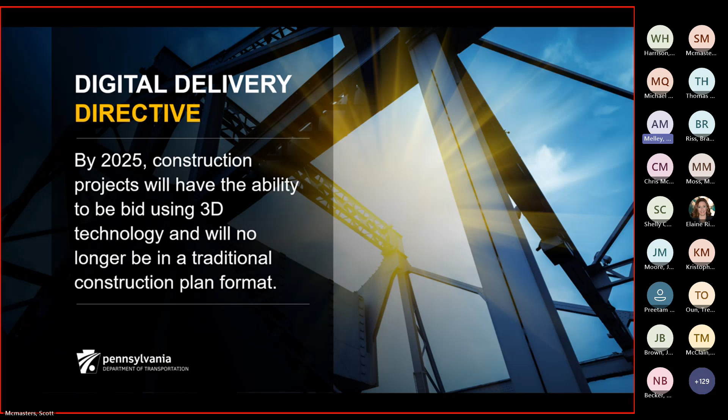So our initiative, next slide, Scott, is really right now consisting of 23 different pilot projects across the state. We're looking at various aspects. So we have 2 projects that have been constructed, 2 are in construction right now. Both of those projects are bridge projects. So complete structure models, no plan sheets whatsoever. Then we have 19 different projects that range all over the design spectrum of where they are. So with that, we are piloting all of these various aspects.

We've seen benefits from the contractors. One of the projects that we have completed actually finished a month and a half ahead of schedule. And we attribute a lot of that to the increased efficiencies that we've been able to realize with our digital delivery projects and our implementation and so forth. But to really get through this, as we are looking at the design and at the construction, we need to figure out how we're reviewing these projects.

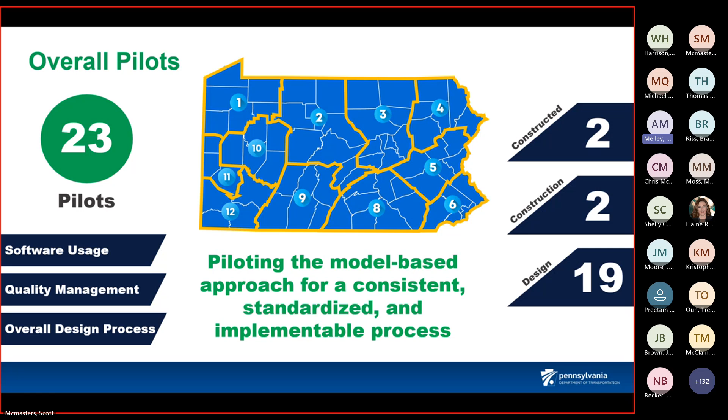And that's where this webinar really comes in: how are we looking at these projects early on in the design, maybe not even at a milestone review, and then at each of those milestone reviews and then getting it out to construction. How are we connecting the data? And what have we done to really set that up to make that a reality? So with that, I'm going to turn this presentation over to Scott McMasters to really go into the nuts and bolts of what we have set up and how that's being accomplished. So Scott, go ahead and take it away there, buddy.

All right, thanks, Alan. So first thing, PennDOT is using ProjectWise as the environment for all this. So with using that environment, we have to think about permissions and setting up things, because we store all the data in ProjectWise. Now, it may be connected out to the review software and things like that, but in order for reviewers to use it, I have to make sure that I set all the permissions, the roles, the information up first. So ours is based off of ProjectWise. We're using enterprise level for access, federation, things like that.

We have 365 Synchro that we're able to use the enterprise roles that are across the board. But then when we get into some things like infrastructure cloud, there may be project-based roles we have to do too. So it's a mix of both right now. Now there's some change coming in the future for some of that stuff, but today we have to do a little bit of different setups depending on which platform we're using for which review and for construction.

Now, the other thing that comes into play with this stuff is internally, we have different users at different roles. So with those roles, they might be a bridge user, a roadway user, they might only have read-only access to something. To do some of the review processes, I have to make sure they have access to write to certain things. So there are going to be pieces of that come up throughout the presentation that point to permissions and making sure you get the things set up correctly to start with.

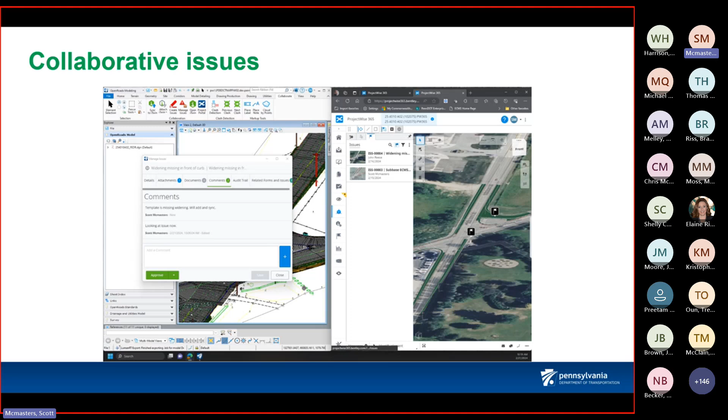Once I add that, we'll go back over to 365 here and we'll look for that issue. So I can go over there. And this was all done at the same time. One thing we have noticed is sometimes it doesn't refresh. So you've got to back out, repick the issue. It's that refresh just like you have on a website. Until you hit the refresh, it doesn't show up. I could hit the refresh at the top also, but it's there.

So I can look at the information. I can go to these and see, okay, when was it assigned to me? How often? I can click on it here, pull it up, look at that actual issue and the attachments on it, the comments in it. Everywhere I go, the comments are going to be the same. They're not different from one to the other. It comes across both environments.

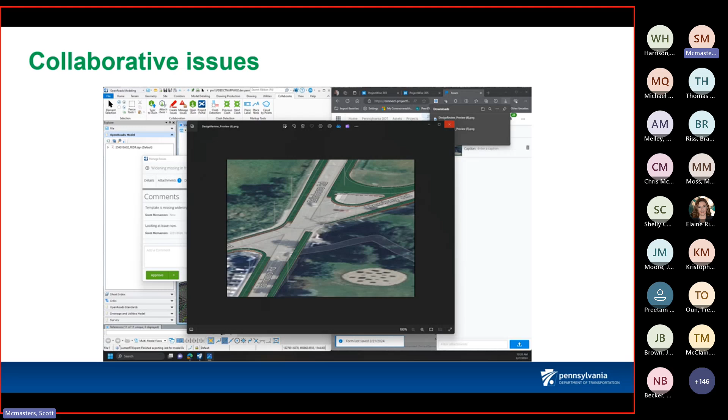Now, this here is opening up a download. So basically, in 365 the images are live, so it'll pull up a model, things like that. But if you're in ORD, I have to open it as a PNG essentially. The other thing is there's audit trails.

I can add attachments, everything else. There's a lot of things around issues you can do. And again, I'm just scratching the surface today.

There is a lot of information I can also provide later or in other presentations. Now, let's switch from that more traditional PDF. Let's start thinking digital. So when we think about digital, the old was that cross-section view. Now we're thinking today, it's dynamic. It's information that's tied to the model.

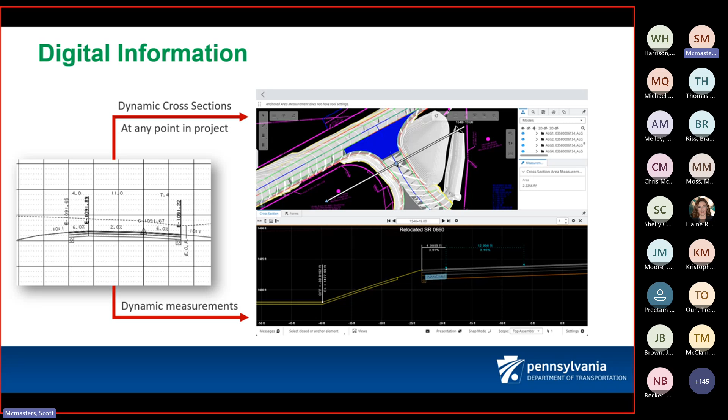So if the model updates, the information updates. In some cases I have to do some manual stuff, in some cases I'm going to automate things as I go through this process. But again, digital information doesn't mean that it's strictly 3D. I'm going to have 2D views. But when I do these 2D views, these views need to be based off of the model. So this is me taking a slice of the model and then adding dimensions to that slice. So it's still a detail, but it's based off the model.

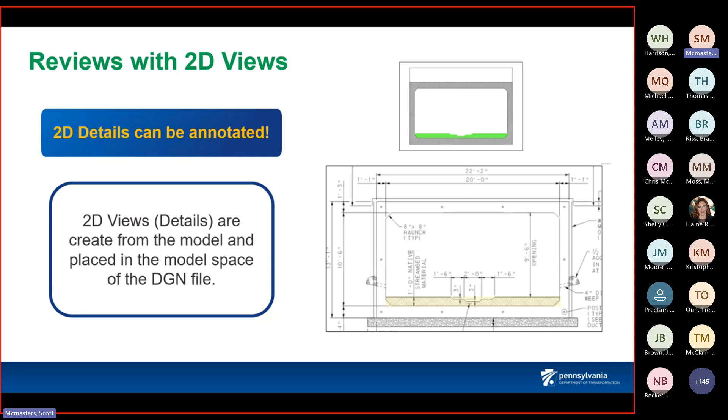Now there are some caveats to this that we found. In some cases you have to make sure that you do the dimension to the components versus 3D lines, because those 3D lines, the way they generate, sometimes breaks the connection with the dimensions. So a lot of times you're going to be going to those solids or those components to get the dimensions to hold, so that as you're updating stuff, things come across.

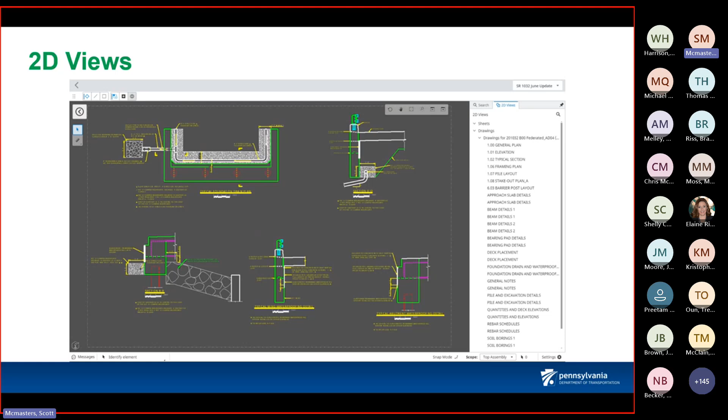So let's look at a couple of those. We're going to take, and this is an example of one of the bridge projects that's in construction right now. These are just 2D details. You can see they're just slices. It's just information. It looks like it always did in a normal PDF or plan set.

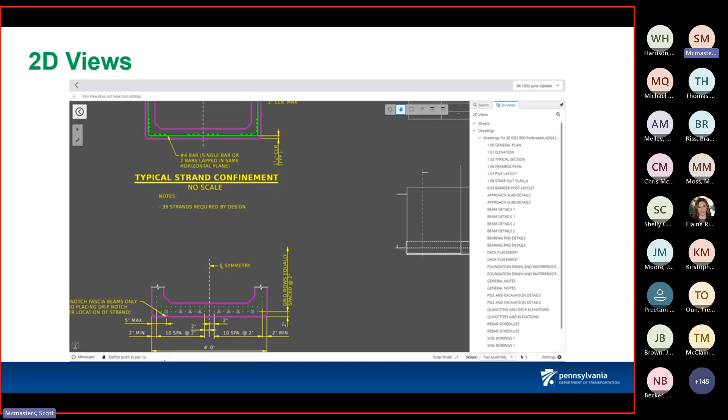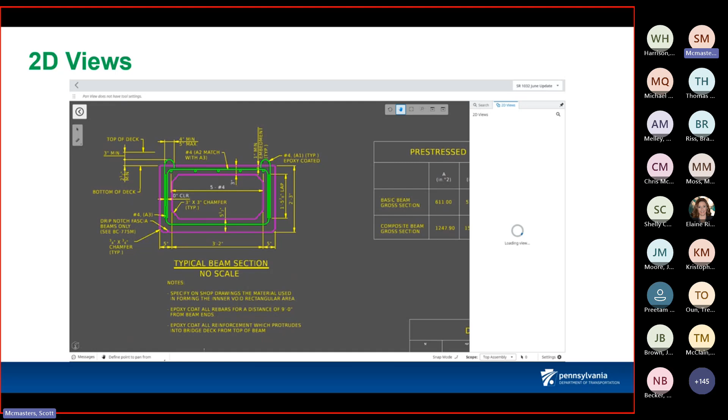But in these cases, we've sliced something. We've added notes to it. We've added comments. We've dimensioned things. This is information that contractors need, or reviewers need, or somebody taking and certifying this document or this model. So these are all things that still have to kind of be there.

And again, this is where we're saying it's not all going to be 3D. You may have a detail that's using that 3D as well. So we're starting to move towards these 2D views that are sheets, drawings, as a way to incorporate the details into the model and not produce that PDF.

Because if you do a PDF, what's the first thing most people are going to do? They're going to print it because the option's there right off the bat. To give this a fair shake, we have to make it that we're providing the information, but still making it a little bit harder to go back to that old workflow.

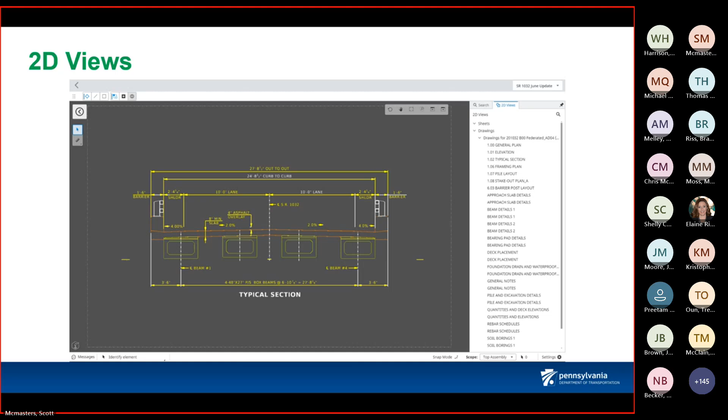Now, as we do all this, one of the key pieces to this whole thing is the federated file. So when we're setting up these models, we have to make sure that federated file is correctly set up. It's very important to have the correct coordinate system.

So with PennDOT, we have two coordinate systems. We have a north and a south. I have to make sure I'm the right one when I create that federated file. I'm then going to reference in my survey and all my other files.

Now, one key piece here, and I'm going to stress this, because if the survey is not set to active, it doesn't turn on that 2D, 3D view. You have to have that for these iModel connections and the information to come across from your native platform into Infrastructure Cloud and ProjectWise 365 and that. So it's very important you set that active whenever you get these files in there.

The other thing is we're only placing the references for the model in here. Currently, we're doing typicals and things as a separate connection to make sure that our fonts and stuff come across correctly. But when we do these references, we also make sure the logical names are defined.

And we're using our 4-character naming convention to do this. The other thing we're doing is a description. And these are pieces that help when you're doing the review and the iModel, because there's times that you're going to click on something and look at properties or hover on it. And if you don't update this information, you'll get master model for everything under description, or the logical name is blank. If everything says master model and everything is blank for logical, where's it coming from?

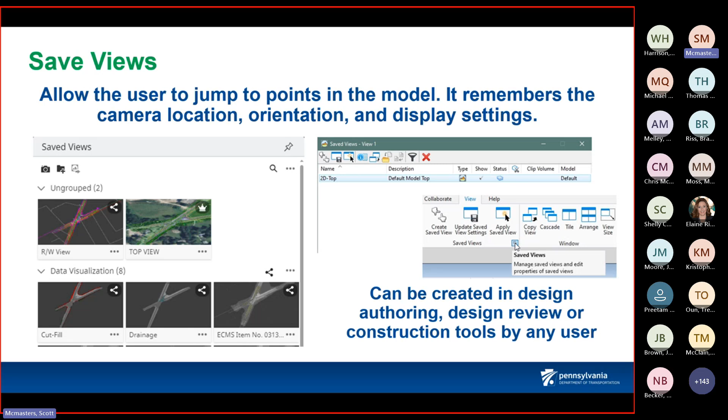By setting up save views, it creates that quick jumping to saved points in the model, things that might be important to an inspector or somebody else throughout the review process. Now, taking that further, we also have data visualization. In this case, I'm taking my pay items, identifying them, and assigning them through item types to my pavement layers. I can turn those on and off. I can also select my base and look at my quantity on the right side. The properties are there from the item type.

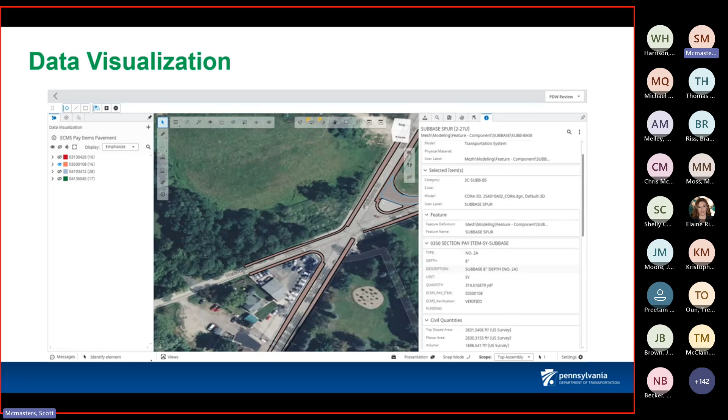Now, if I go over and turn that base off, and I just have sub base, I do have to click off and come back on to the object I want. But again, you can see it switch to the sub base. There's the quantity, there's the pay item.

Now, if I go to a different visualization, this case it's going to be sidewalk. One thing to note here is if I pick that from over there, you can see it says varied on the right side. That's because it's picking everything that's underneath that particular item. To get actual quantities, I have to go to that element within the model. So if I don't pick the element, I'm not going to get the information.

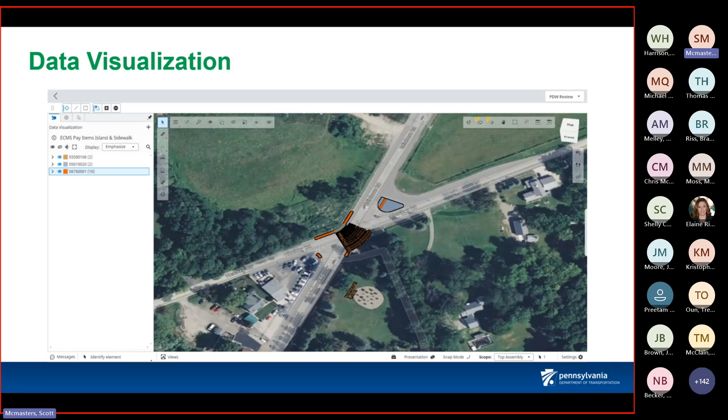Now, some of this stuff is still things that are going to go to reports. So we don't get rid of reports. There's still some things there that you'll see through a report or through other areas to get quantities.

The other thing that has helped us a lot is corridor analysis. This is a tool in our toolbox, is the way I like to look at it. Now, the key piece here is this is based off of alignment, so any components associated with that alignment today, this allows us to pick. Now I can do station ranges. I can also pick what I want to analyze or what I want to ignore.

So when you see this resurfacing group here is what they're calling it right now. Again, this is in preview, but they're calling it that because one of the things we ran into was with our data set, we had a mill or an overlay component in there. Well, our milling component actually went across a couple of the layers, so it was having a tough time distinguishing what do I group it with, or do I want to analyze this for changes?

Well, we know milling and overlay components are going to vary from template to template possibly, so every drop might be different. Do we necessarily want a report telling us that when we know that? No, but we do want to see it still in the sections or in those type views.

So there's that ability. The other ability is to look for changes in the layers. And if you look at the one shot there that says corridor analysis settings, that's where those change onlys can be flipped on to go to things. And you can look for changes in width, depth, cross slope, elevation. The other thing is, in the next slide I'm going to show you, is that force to top. There's things that switching that off helps you with as far as this review process as well.

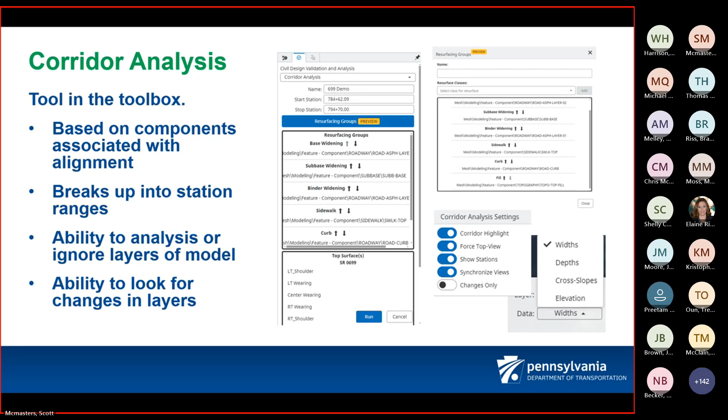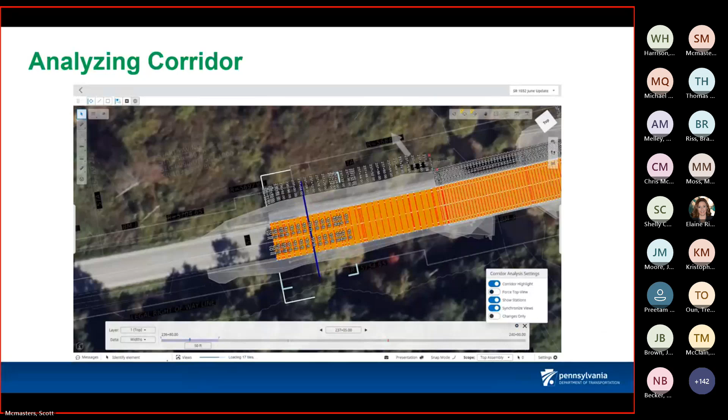So here, I'm just going to open up one of those corridor analysis. This is a bridge project that we're doing new approaches and overlaying the structure. So I'm going to turn off the force to top, and the reason I'm doing that is so that I can orient this so it basically lines up with my cross section. And you can see there, I picked my cross section.

Now, one thing that is kind of a caveat right now is when you first go into this, you do have to step to the first station. It doesn't start on one of the red lines. If you're not on one of those, you're not going to get the information. So today, this is limited to template drops. But you can see here, I have elevations, I have slopes, I have links, information that we had to manually do before.

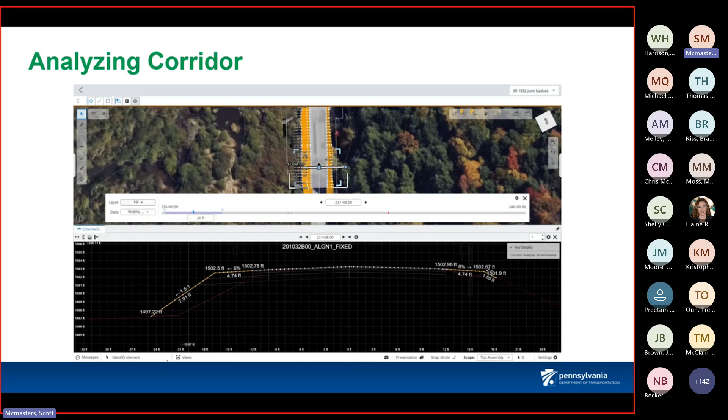As I switch between those layers, the information goes along with it. If I want to turn off one and turn on the other, I can do that. It's all dynamic. If I want to switch to a different piece, it's all dynamic.

As I step through this, you see there's buttons left or right where the station's listed. If I do that in the top or the cross section, those are synchronized, matching up with that other piece from the last slide. So as I step through, whatever I'm looking at in my top 2D view is the same in the cross section view. That's very helpful for non-CAD users to get to the data easily.

Right now the designers are doing most of the setup when these analyses are created, so that it's prepared for the design review. It's not something the reviewer is going to have to set up. That comes down to the designers knowing what to pick for features, what to group together, things like that, which a reviewer wouldn't know.

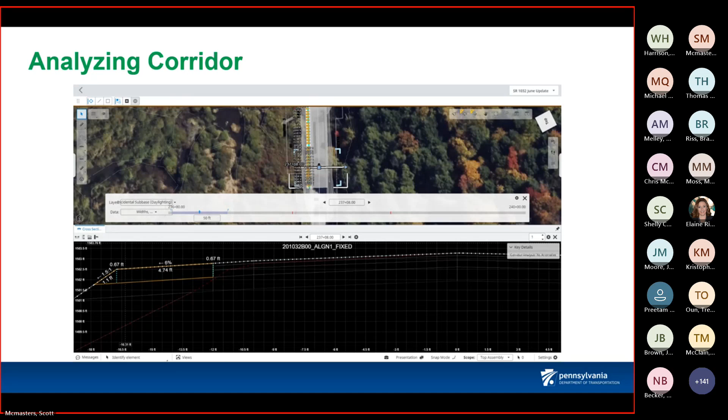So the next piece, drainage. I'm using data visualization, highlighting my drainage. If I go in and pick the inlet, pick a manhole, and right click, it's going to give me the drainage profile from that inlet to that manhole. When this populates on the bottom, it's going to show all the inverts, the rims, the sumps, my slopes of my pipes, what type of pipe it is, RCP, the size — all that's available.

As I move back and forth in that profile view, it shows me where I am up in the 2D view at the top too, or the 3D view, whichever you have it oriented to. Also, I can pick on an inlet and see those properties from drainage and utilities. So the information that's there is available.

Now, one thing that is not available right now that we're still working through is how do we look at some of the flex tables and other information with drainage. That's one piece we're still trying to figure out. Again, this is looking at the information that's modeled, but not necessarily all the analytics. So that might be something still in a report or another document as part of this process.

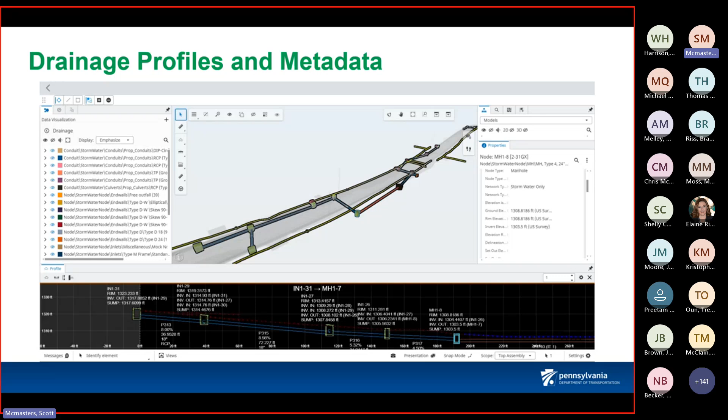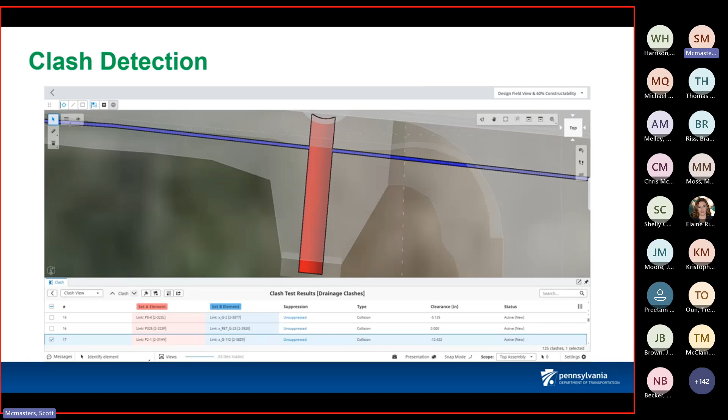The other thing is, as I go through drainage, where do I have clashes? Where do I have utilities that might be impacting that? With this, I need to go through and identify those different locations. I need to look at this stuff. So I'm going to go through, and in this case, set A is all my drainage, and set B is all my utilities.

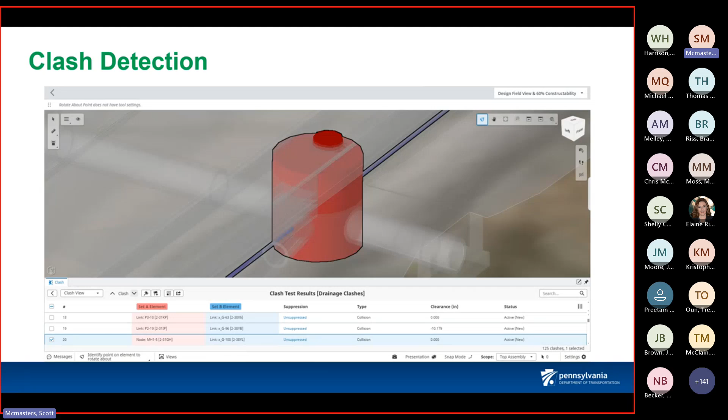I can actually rotate these and step through each one. So I can say clash, go to the next one, and it's going to bring up the next one. On this one, there were 125 clashes identified going through this.

So this is something that, had we not modeled the utilities, not modeled the drainage, might not be as obvious in the field. We may have done SU, but you might have had to do a lot more SU than you needed. This gives you places to pinpoint and identify — oh, I need to concentrate maybe here to make sure where the pipe is, because that gas line is going to interfere with this cross pipe I'm putting in here. So it's giving that ability to look and find and identify things that might help with eliminating those change orders and construction issues.

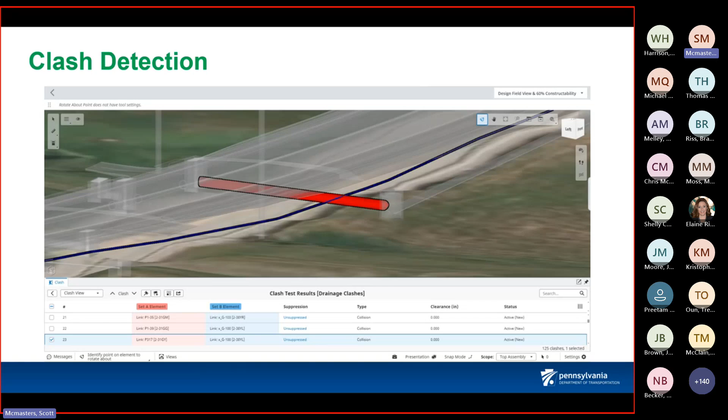It's helping for that, but it's also helping reviewers know, okay, do I have the utility company notified? Are they looking at this to relocate this line? How are we addressing these things? These are things reviewers approving a submission might be looking for. So there's a lot of possibilities there as well.

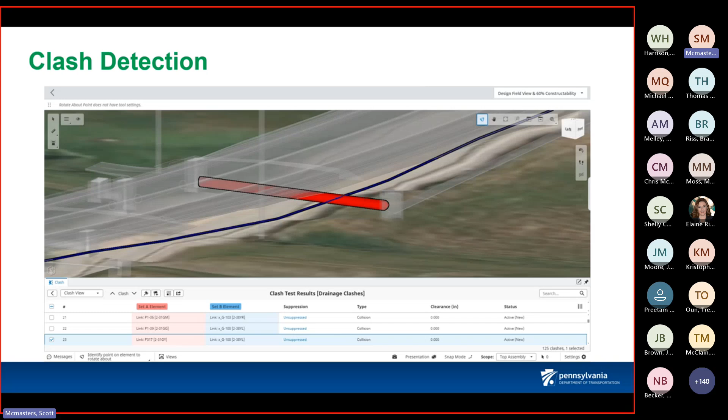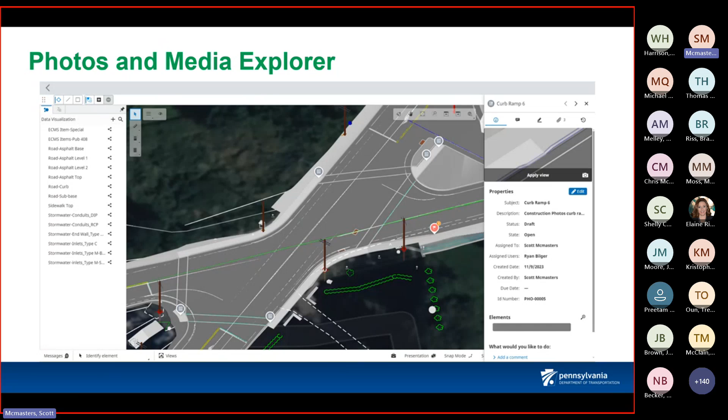Another piece of this is Photos and Media Explorer. Think about if you're doing field work and you want to make sure something's captured for the reviewer to look at — maybe it's a curb ramp. You want to show what it looked like out there so they can see why you did something, or maybe it's an issue you want to portray to somebody. Those are all things we want to incorporate with this. So with that, I can go out and add those as issues.

I can add those as a photo collection form, but then there's AI in here. So there's the ability to also search for certain things. In this case, electric pole. And you can see if I pick on the items that are gray down in the lower right, it's going to highlight those. So it's highlighting the poles.

Now there are some things it doesn't necessarily find yet, but again, that's all part of the process of piloting and trying this stuff and seeing what we can do, what things are showing up, and how can we improve this. So it's not without challenge. There's definitely things we're going to come across that don't necessarily do everything we need to do today, but we'll continue to add tools to the toolbox, pieces to the reviews as we go forward with this.

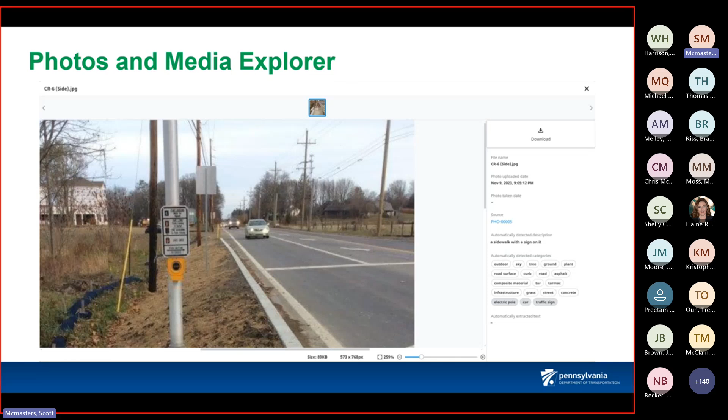So as far as the review, that's all I had today to kind of show you this stuff. One thing I'll point you to is if you're interested more, if you want to see what we're really doing, go to our PennDOT website. We have different demonstrations, videos, other webinars we've done that go into more detail on different aspects. It's hard to show everything in this one.

The other thing is we do updates monthly with our business partners and our internal staff. We have a monthly meeting that's open for them to look at stuff and hear what we're saying and give feedback. But we're also doing internal quarterly webinars. We have a quarterly webinar coming up this Thursday that's going to be based on construction, so it's going to be more oriented towards construction stuff.

We also do newsletters that give you information about the pilots. It might be a contractor talking about how this went with their project, or it might be a designer and how the review went with their project. That stuff's all available through our website. So there's a lot more information available and out there.